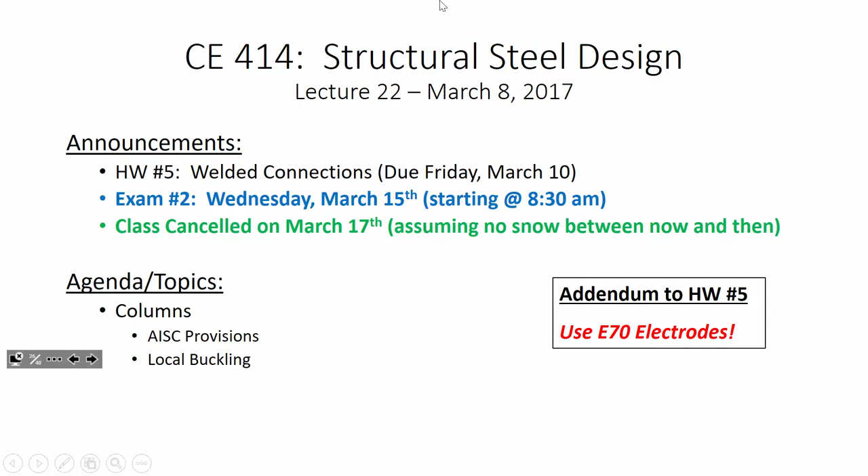Let's talk about steel. It's, I christen thee the Britannia or whatever. All right.

Okay, let's get into the world of steel. All right, settle down. Let's start going back to steel.

So if you remember from last time, we started talking about column behavior, and we started off deriving the fundamental Euler buckling equations - for the load, pi squared EI over L squared, and for the buckling stress, pi squared E divided by the slenderness squared. After we derived all that, we said, okay, here's why they're wrong, or why they're not good enough. We found there were two really big reasons why they were wrong.

Mr. Cruikshanks, give me one of them... residual stresses, okay? Now give me another one... the imperfections, exactly. Remember the fact that the member is not perfectly straight, or it might be out of plumb - there's your geometric imperfections. And the fact that you have stresses locked into the member affects its capacity.

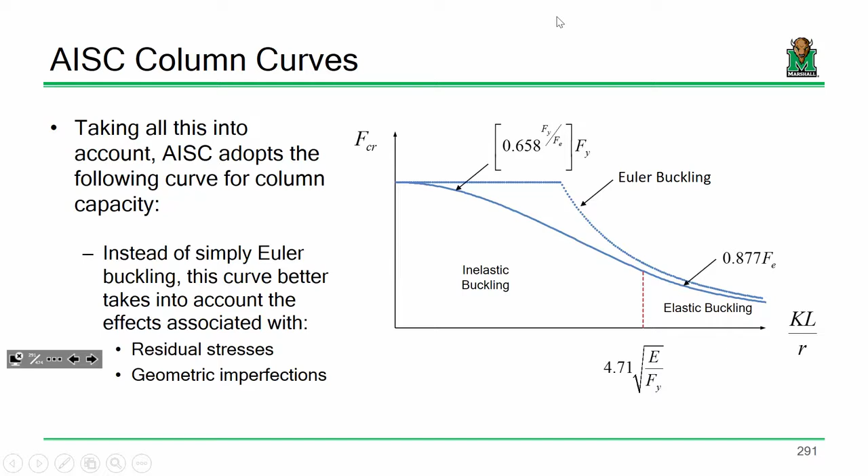So if I look at the capacity of a column, I want everybody to open their manual and go to chapter E this time. An easy way of finding this chapter: remember the shear lag table, table D3.1, where your shear lag factors were? This is chapter D. Turn a couple pages and you'll be in chapter E.

So I know the equation's on 16.1-33, but I'm actually on 16.1-31. The first thing you'll notice is that the phi value for members in compression is always 0.9, and that's for everywhere in the chapter.

Now, one very important guide I ought to mention is on page 16.1-32. If you look, that guide has a bunch of different cross-sections: I-shapes, tubes, T-shapes, and angles. Based on the cross-section you're looking at, it will tell you what section of the code you need to be using.

So if we're talking about just regular old wide flange columns, W sections, we're going to be in section E3 or E4. E4 really isn't going to matter as long as we have sections that are symmetric, which W shapes are, so we're either going to be in E3 or E7. We'll talk about what the difference means today, but I want to soft pedal that for now.

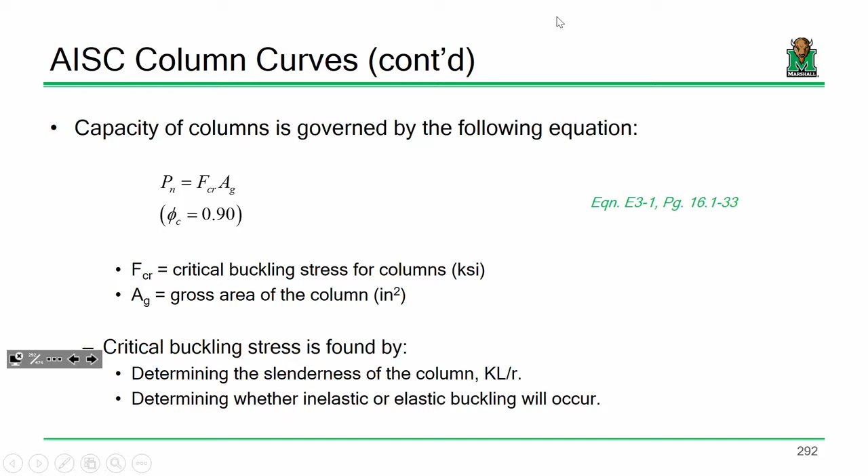Right now, we're going to assume that we don't have any slender elements, so we're going to be in section E3. So our capacity is going to be F critical times the gross area. And how do we compute F critical? It's like this, and you can see it on that next page.

If KL over R, our slenderness, is less than or equal to 4.71 square root of E over Fy, this is our capacity. Otherwise, this is our capacity.

Again, this is something I mentioned earlier. This Fy over Fe, it's not 0.658 times that fraction, it's 0.658 raised to that fraction. So you compute that fraction, and if it comes out to be like 0.4, then it would be that number raised to the 0.4. That equation just comes from going down to the lab and failing about 100 or 200 or 300 columns and recording all those stresses and mapping an equation that fits.

But I do want you to understand that there's a sound theoretical basis behind it — again, geometric imperfections and residual stresses. Sound good? All right.

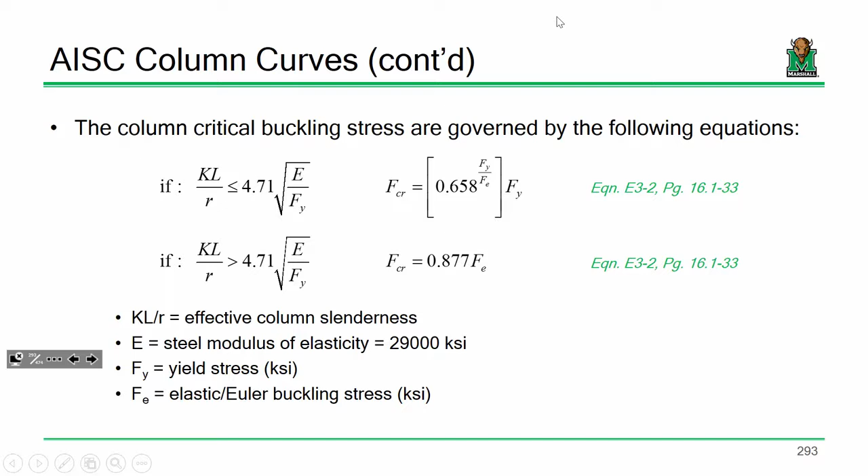Now, our elastic buckling stress is this term, F sub E — that's the only one that's not shown up right here. We have our KL over R, which is our slenderness, E is 29,000 KSI, Fy is the yield stress, and Fe is our elastic or Euler buckling stress. I didn't say the Euler buckling stress wasn't useful — it is used in the model we use to compute the capacity.

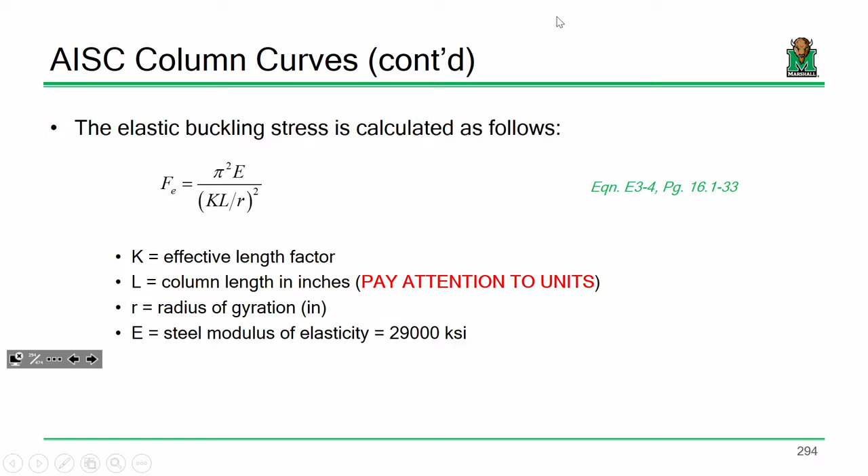One point I'll mention is make sure you're being consistent on your units — we mentioned this earlier when we talked about tension members. If you have a 15-foot long column and you divide it by R that's in inches, your slenderness isn't going to come out right. So make sure your units are all consistent — express your column length in inches when you're doing the raw calcs. Does that make sense? Everybody okay with that?

Now there's one other consideration you have to mention, and that's local buckling. Local buckling is essentially what I was mentioning in table E1.1, which listed the difference between non-slender elements and slender elements. Everything we've talked about so far assumed the column behaves as one cohesive unit—when I load it and it buckles, the whole thing buckles. That make sense? Well, that might not always be the case.

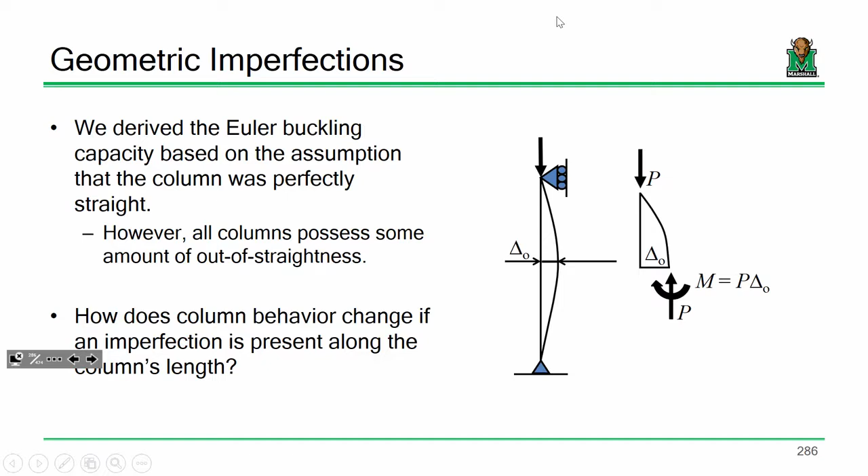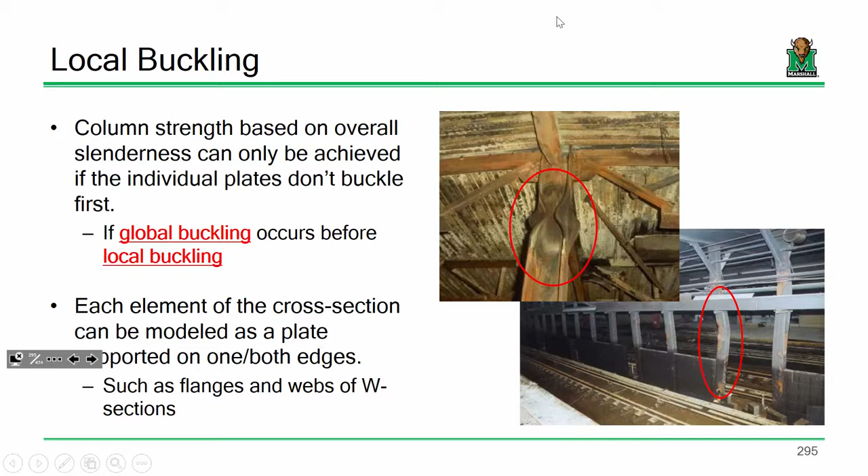But when we're talking about local buckling, we're not talking about the local buckling of a beam type element. Remember our derivation assumed a beam with some length L, some E, and some I value. When we're talking about local buckling, we're talking about buckling of a plate. Now, plate mechanics is its own unique snowflake—when I was in grad school, I had a whole course in just plates and shells.

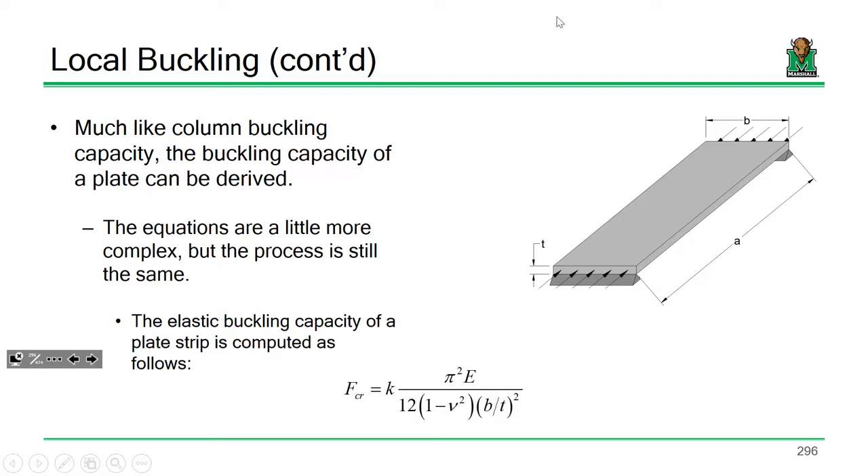Everybody okay with that? Now this term K is kind of like an effective length factor, but it's heavily dependent on the dimensions of the plate. If you start changing the dimensions, you get really different variations on what K is. For instance, this curve A assumes that this long side and this long side are clamped, fixed end. And if I vary the width to thickness ratios, these are the K values that cause buckling.

When you get into the math — and we're getting into some really heavy math, I don't want to go too nuts into that — as you vary the slenderness of the plate, your K value starts to change. But one interesting finding is there's a floor, a lower bound value. The lowest value of K you get for a fixed plate is about 7. Like if this is 6 and that's 8, it's about 7. Everybody see that?

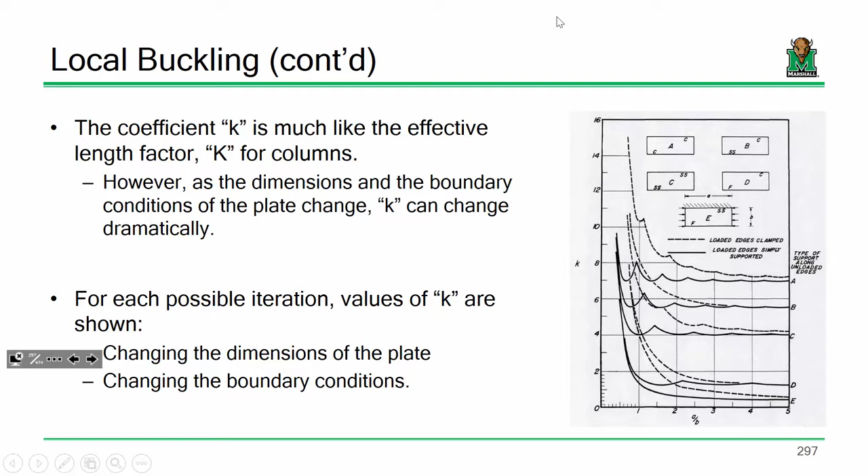So for different boundary conditions, you can find a K value for the plate that'll tell you whether or not it's going to buckle. If you take those floors, like I said, about 7 — numerically it ends up being about 6.97. For fixed-pin, fixed-fixed, fixed-free, whatever, here's all these different cases of K.

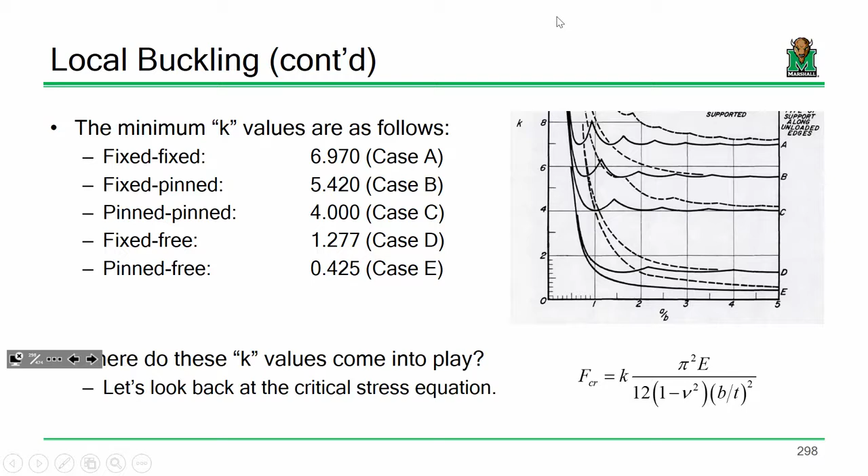Now here's where they come into play. What I want to do is figure out if there's a way to check a flange or a web to see whether or not it's going to locally buckle.

Now if you notice, let's look at some of the dimensions on this sheet — area, depth, web thickness, flange thickness, everybody's seen this. But look on the page on the right, and notice the compact section criteria. There's a BF over 2TF, and an H over TW. Those are essentially the B over T ratios for the flange and for the web. So let's see where they come into play.

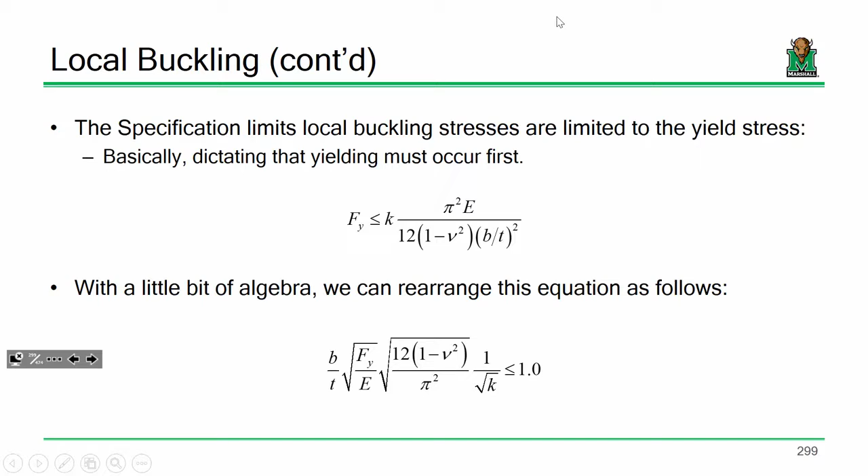Now all I did here is a little bit of algebra and rearranged that to put everything onto one side. The reason why is if you go through and do the math, just like with columns, you get a bit of an inelastic transition at around, for plates, 70% of that value you see on the x-axis. So I'm going to set that term less than or equal to 0.7.

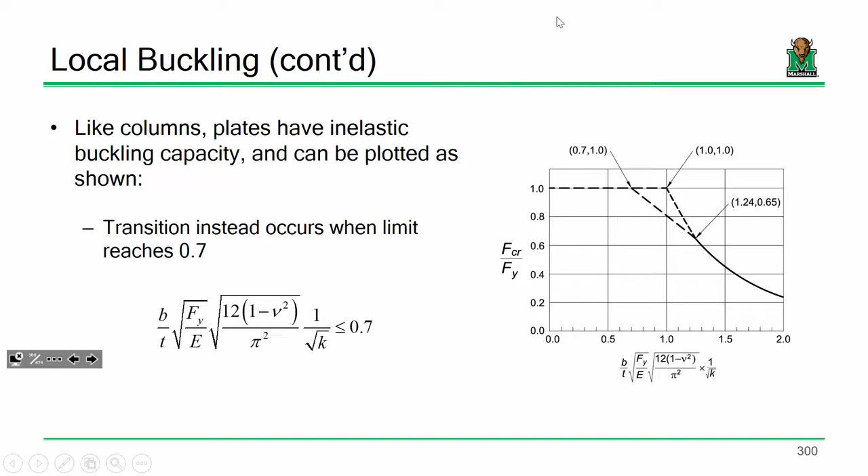And I'm going to rearrange and solve for B over T. Now when I rearrange, this is just algebra — I'm sure you all could take this and put it over here, E over Fy, multiply it over and all that. If you notice, I've got pi squared, 12, 1 minus nu squared. Remember Poisson's ratio for steel is about 0.3. So you can plug and chug and determine this.

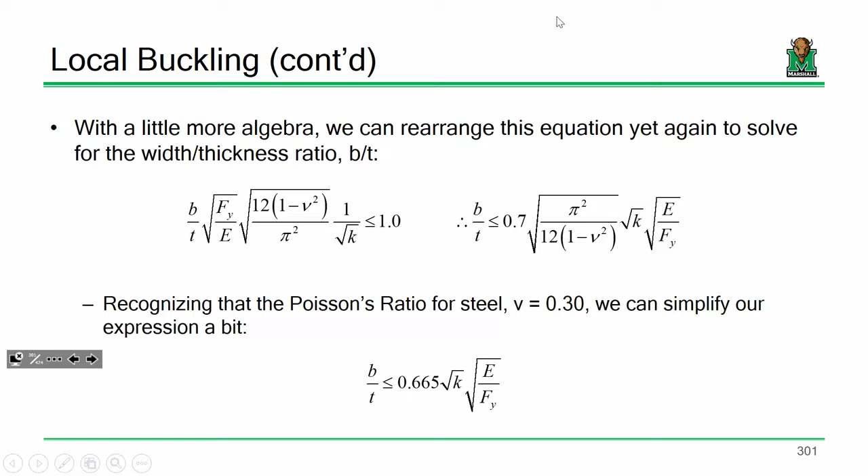This is actually a little more important than you would think, because this tells us whether our plate reaches a certain slenderness value or not, and whether or not the plate locally buckles. The only thing we don't know is this term K.

So the way I'm going to handle K is by differentiating between a stiffened element and an unstiffened element. An unstiffened element is an element of a cross-section that's only supported on one edge.

So if I've got an I-beam, an unstiffened element might be like this portion of the flange, because it's only supported on one side. Does everybody see that? That could be a flange, a leg of an angle, a channel flange, or any of the stems on a T-shape - any section only supported on one side.

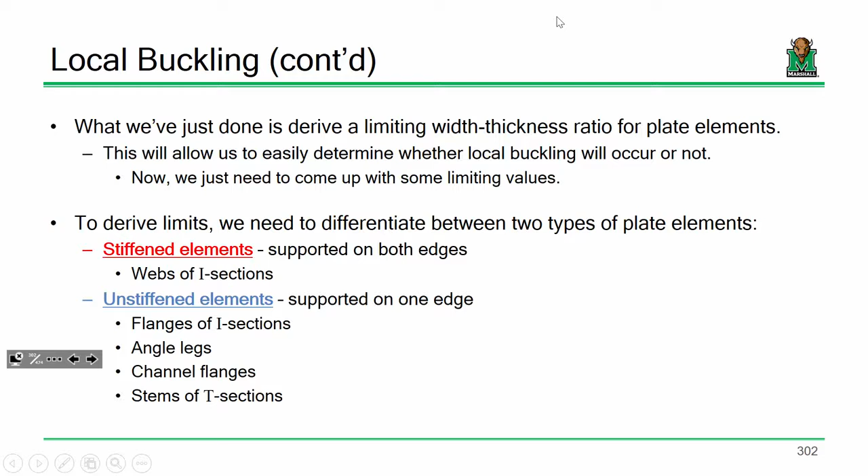A stiffened element, like the web of an I-beam, is supported on two sides. We'll call that a stiffened section. If we're talking about plate buckling, it would make sense that an unstiffened element is going to behave a little differently than a stiffened element.

So here's what we're going to do. Let's take a look at this dimension right here. Remember, we've got a W shape going in and out of the screen. So what do we have? We have fixed, pinned, or free. I say that this is free, but what about this? Is this a pin support? Is that a fixed support?

I don't know. For government work, what we say is we'll assume that support is not quite fixed, not quite pinned, somewhere in between - about a third of the way between being fixed and being pinned. There is no such thing as a perfectly fixed support or a perfectly pinned support; it's somewhere in between.

A third of the way between - which one's it closer to, fixed or pinned? It's closer to the fixed end. It does offer a fair amount of rotational stiffness, but not infinite.

That's a great question. I'm saying it's more fixed than pinned, but not all the way - we have to reduce it down a little bit. To give you an idea, if you go back to those graphs I showed earlier, remember stiffened elements - this one was about 7, and this one's about 4. So we'll say 5. Actually, I got that backwards - it's on the other side, closer to the pinned side. Sorry, I'm getting sick, I think that's what it is.

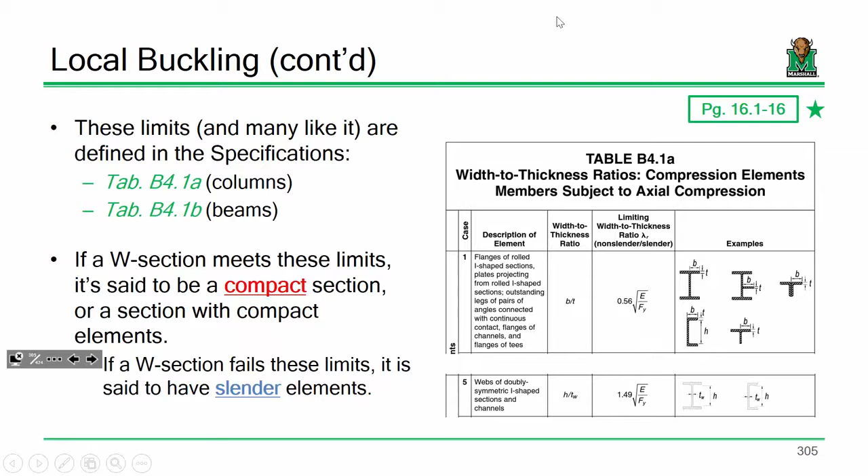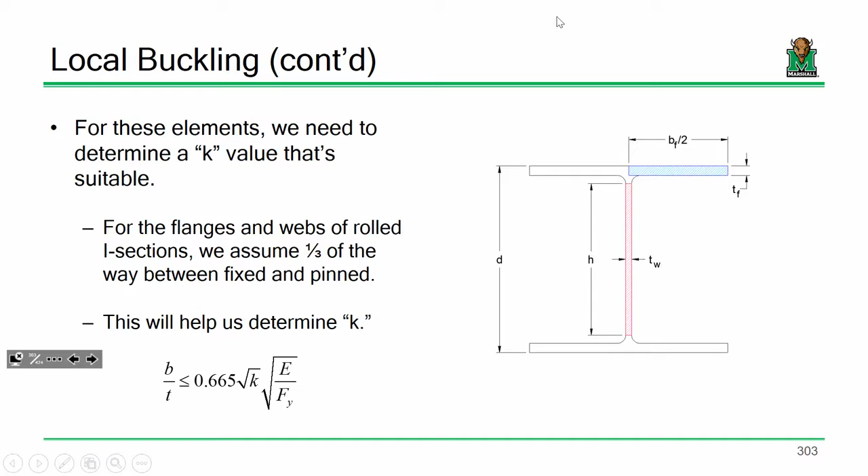Because we're talking about this element, and what I'm saying is this is B sub F, but this dimension right here is BF over 2. So this width divided by that thickness, that's where the 2 comes in. This element right here, we're not talking about D, we're actually talking about a dimension H. But again, let me be clear, you don't have to compute any of these, because like we just saw, go to section 1, they're right there in the manual. Sound good?

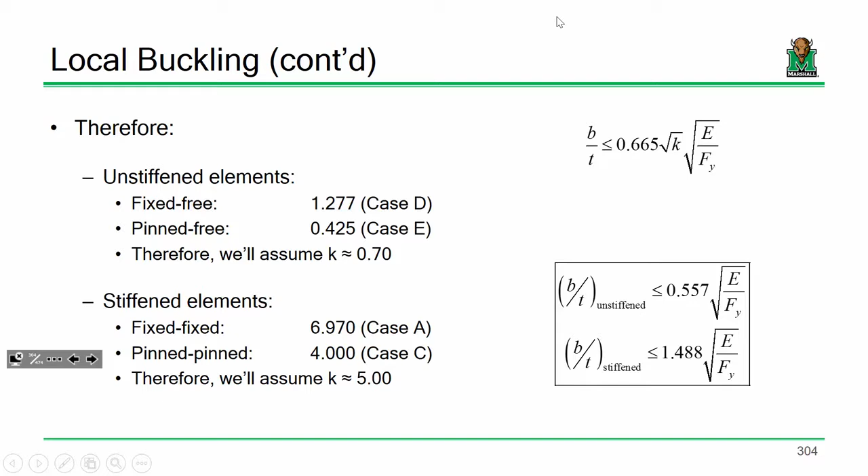No, it's just because it's half that flange. Yeah, algebra. Sound good? So here's the procedure for column analysis.

If we've got a given column and we want to determine its capacity, the first thing we should do right off the bat is see whether or not local buckling governs. Now, let me be clear. If you fail one of these limits, it does not mean that if you put a feather on this column that the column explodes, okay? That's not what it means. What it means is that we have to use a different section of the specifications. Go to that user's table in Chapter E, and what does it say?

If you have non-slender elements, which is going to be the case for us most of the time, we're going to be using section E3. Read what the title of section E3 is: it says flexural buckling of members without slender elements, okay? What does section E7 say? Members with slender elements. So all it means is that if you have a section with slender elements, you just have to account for that. You have to account for the fact that local buckling is going to govern before global buckling.

More often than not, we don't want that to happen, but if it does, it doesn't mean that the column is unusable or that if we place a feather on the column it will explode, okay? That's the only point I want to make, because I think a lot of times if a student or even a young practicing engineer calculates this limit and finds it fails, they think, oh God, the column can't hold up, and it's done. No, hold on. It just means you got to use a different section of the spec. That's all it means, okay?

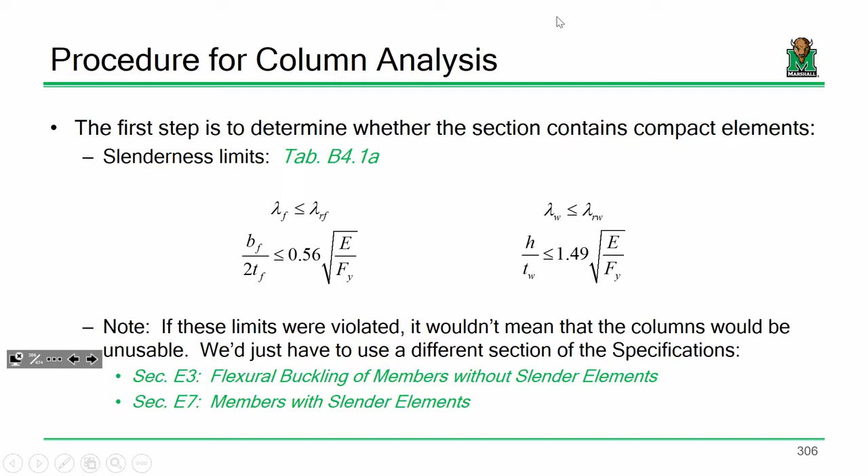Sound good? All right. Now, procedure for column analysis, okay? My way of describing this actually comes from when I took steel design. The professor I had sort of mentioned this, and I thought it was a really nice way of mentioning it. How many of you have ever mowed a lawn?

Okay, all right. So I would say this method is your push mower. That's the one, you know, just pushing it down. It'll mow anything.

Just like that, this one will mow anything. Okay, it will handle any lawn, but it takes a while, right? Now this one is your riding mower, right? It's simple, it's easy, you just drive. But you can only use your riding mower in certain instances, like you can't use it on a lawn like that. Got to be flat.

This one's somewhere in between. This is like your self-propelled mower, somewhere in between. Kinda. Hard language, sir. Language. Okay. All right.

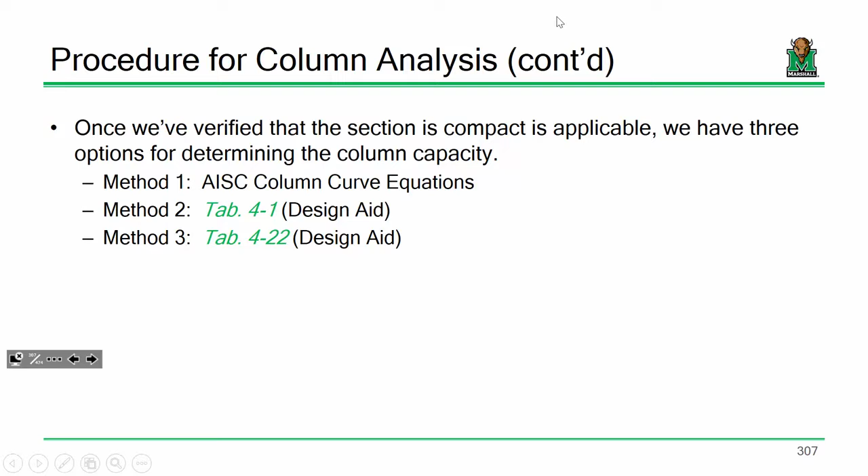Now the first method is to just use the equations. Just plug and chug, do the math, okay? That's method number 1. And we're going to do an example where we use all 3, okay?

Let me show you something real quick. I'm going to skip ahead and show you some tabbed regions, okay? Method number 2 is to use a particular aid in the manual. So we're tabbing like crazy today, I know. Method number 2 is to use table 4-1. Table 4-1 begins on 4-12. If you look at your gold tabs, it's right in the section that says COL for column.

Let me be clear, this is one of the most important aids we'll use, not only for columns, but in the class in general. This is the aid that we use to design. This is the one that we use to pick a given column. A couple other things, there are some limits to this aid.

For instance, right there, there's a big limit. The Fy is 50 KSI, so if you have a yield stress that's different, can't use it. There's number one. Number two, this only works for W shapes, and specifically W14s, W12s, W10s, and W8s.

And why are we only looking at W14s, W10s, W12s, and W8s? Well, those four cross sections and all of the family of shapes that are in W14s, 12s, 10s, and 8s are the I-shapes that are the most square. In other words, the width to depth ratio of those shapes are fairly uniform. And that's really important because it makes your Rx and Ry fairly equal to one another.

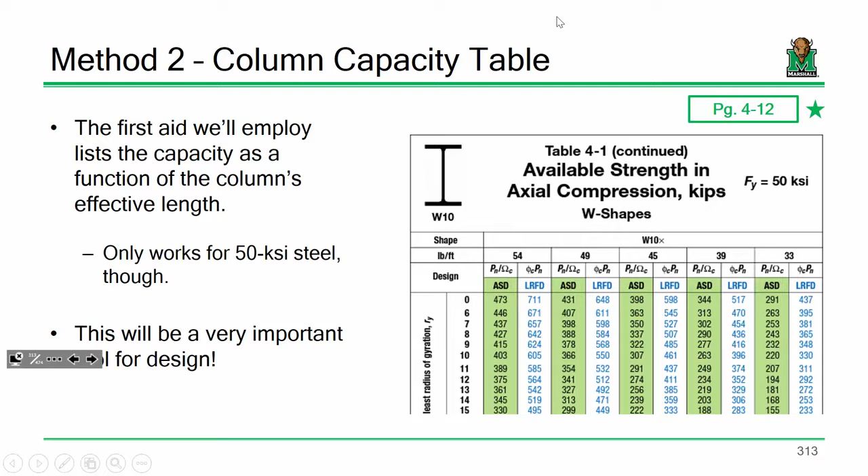So the limit is that you can't use it for other grades of steel. Like if you had a tube that was grade 46, you'd have to just go through and do the math, since that's not what is normally produced.

The last aid that I'll mention, and we're going to go into detail on these, is table 4-22. It's at the end of the column section. I call these the KL over R tables. And all they do is basically say, based on a given KL over R value, what is your phi F critical? So if you notice, if you have a slenderness of 82 and your Fy is 36 KSI, your phi F critical is 22.7 KSI. That multiplied by the area, and there's your capacity. So it's sort of halfway in between.

All right, any questions? What's that?

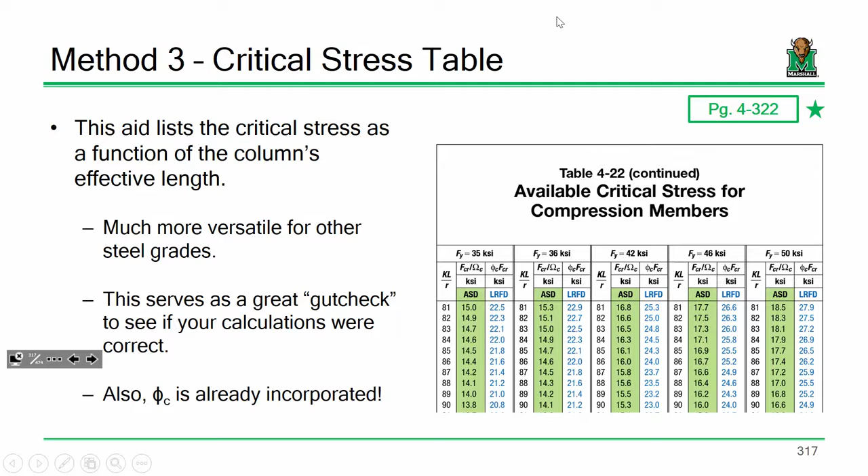Yes, it is. We will be using quite a bit of it. Everybody good? Now I'm going to hop back a little bit because there's something I want to point out.

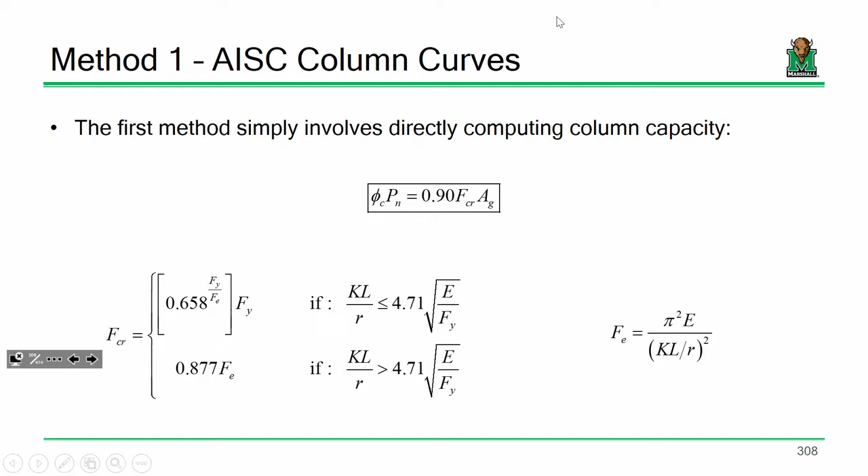So go back to method number one, which is just using the AISC equations. I would argue that one of the most complicated aspects that's going to bug you all in computing a column's capacity is slenderness. In other words, if you get the slenderness right, I have found that 99 times out of 100, a student gets the problem right.

Here it's showing tensile strength. You're probably in the wrong section. Yeah, the next section. I was looking through it. Do we have to calculate all these things, or are those lookups too? Good question. If you look, it says yielding and rupture, that's what we were doing.

And you're probably looking at me like, why didn't we use that table, right? Yeah. If you look at the bottom, how did they compute the rupture capacity? Phi equals 0.75, that's what we did. No, the user note. Tensile rupture on the effective net area of whatever. Yielding, tensile yielding. No, you're not seeing it.

Hold on, no, I'm talking about the area. No wait, I'm sorry. I said look at the bottom. I want you to look at the top. How are they calculating the effective net area? 0.75, that's the exact same assumption we made.

Okay, let me just say this. If you had used our equations versus using these tables, I'm just telling you, you wouldn't have saved a lot of time. Because in the end, all this would have done is allowed you to select a member. You still would have had to go back and check it. Okay? And let's also be clear, we still have that same limit.

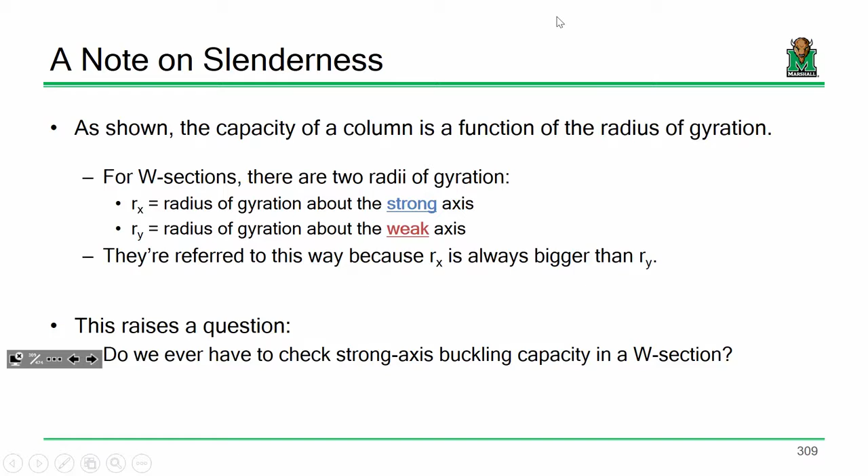Let me explain, okay? Let's look at this cross section, let's look at this column. So I have a column that has a fixed boundary condition on the bottom, and the entire column is how tall? It's 35 feet tall. Okay, now so what I'm saying is along the strong axis, it has an unbraced length of 35 feet. In other words, there's nothing preventing this column from buckling out this way. There's nothing blocking it, okay? So along the strong axis, it has a length of 35 feet. Is everybody okay with that?

Well, that's the strong axis. Now the weak axis, does everybody agree that the column, it's going to be easier to buckle this way than it is that way?

Is everybody okay with that? Now, the weak axis, it's not the same story. With the weak axis, I got stuff in the way. I've got an element here and an element here.

Probably those are beams framing in, right? This column would be something you'd find at a hotel, and you go into the lobby, which can sometimes extend over a couple floors. So this is one of the columns in the lobby. Here's the second floor, here's the third floor, here's the fourth floor. But out here's the lobby, so you've got that one column being braced in one direction, but not in the other.

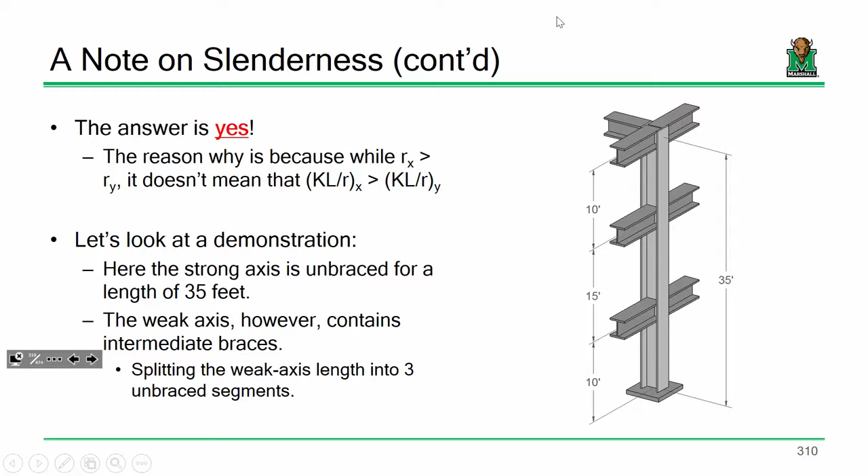In fact, what we would do is take this column and divide it into a model that looks something like this. So I've got here an image of the column in the strong axis. If you notice, this is the column that's wanting to buckle like this. You can see here's the flanges, and we're talking about the column buckling this way. In that direction, all we have is a fixed-pinned column that's 35 feet long.

This symbol right here is trying to illustrate what the column really looks like. If I was looking at the column like this, I would see a flange, and then that's the web. Does everybody see what I mean? Okay, that's the column in this direction.

In the other direction, I've got fixed, pin, 10, 15, 10, and what I am seeing is the flange, but then these two dotted lines right there, does everybody see those? That's the web. So you got the flange and then the web sort of behind that. Everybody see that? Everybody okay with that?

Okay, so what we're going to have to do is check each of those sections. I'm going to get a KL over R for this, a KL over R for this, a KL over R for this, and a KL over R for this. Each one of those KL over R's, whichever one is the largest, that determines how strong the column is. Does that make sense?

So speaking of, why don't we do this example next time? So this example, let's be clear, we have a W14 by 90. Its Fy is 50 KSI. There's the strong axis bracing. There's the weak axis bracing.